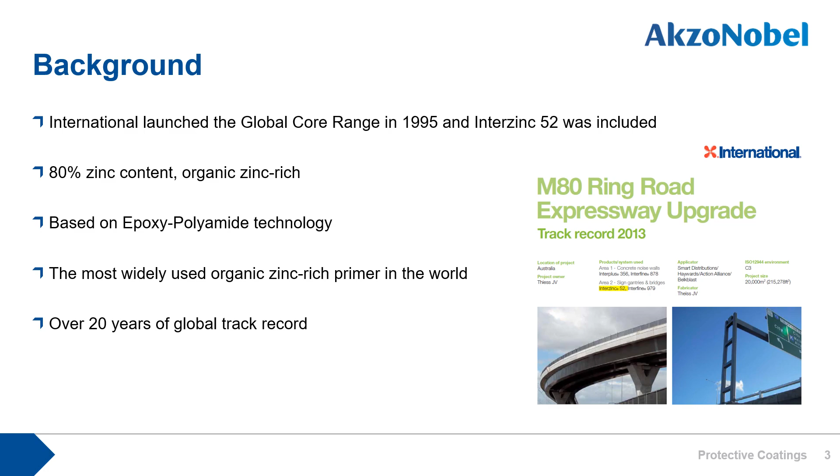We'll start off with a bit of background. International launched the Global Core range in 1995, and Interzinc 52 was included in that range. It's got 80% zinc content, organic, zinc rich as per ISO 12944. It's based on epoxy and polyamide technology, and Interzinc 52 has been the most widely used organic zinc rich primer in the world, with over 20 years of global track record to back that up. An example there on the right hand side.

Just a bit more recap on Interzinc 52. We've sold over 70 million litres globally, equivalent to about 400 million square metres of steel. We've used that in all markets: oil and gas, infrastructure, mining, power and so on. Got a great track record of excellent corrosion performance, and the application properties of Interzinc 52 have always been considered very good.

So the challenge to us at AkzoNobel International has been: how can we upgrade our offer? Looking to improve things like volume solids, drying times, overcoating times, and VOC. Feedback from our applicators has been it's really important to maintain the excellent application properties of Interzinc 52.

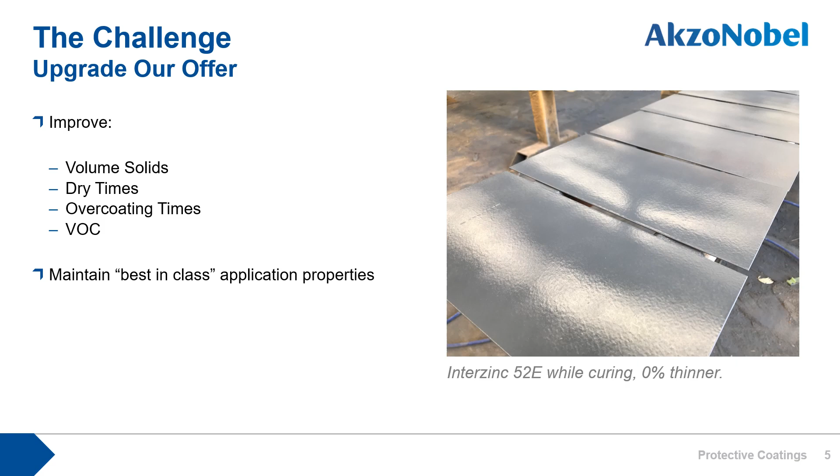So, Interzinc 52E, what are the key features? Well, we've maintained the excellent application properties, but at the same time we've improved productivity and we've maintained the excellent anti-corrosive performance.

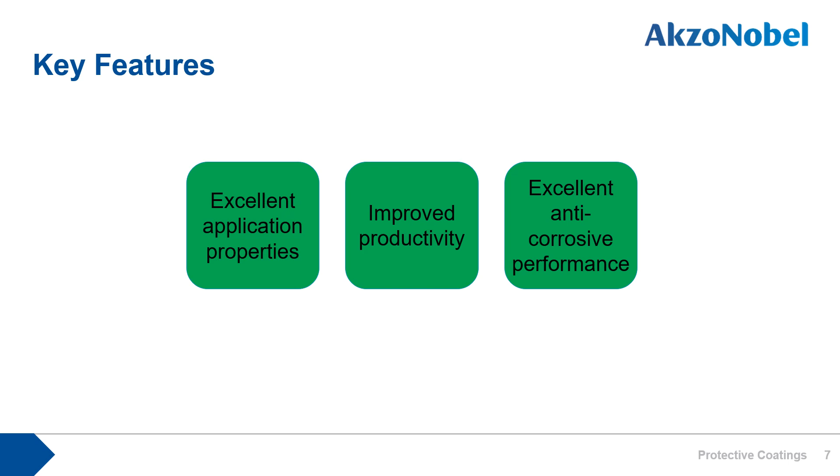So a bit more on Interzinc 52E. It's a two-component, high solids, fast-drying, rapid recoat zinc-rich epoxy primer, with 80% zinc dust in the dry film, as I mentioned earlier. That's compliant to the zinc-rich requirements of ISO 12944 and also to SSPC Paint 20 Level 2 Type 2, which requires 77% zinc or greater. It's 65% volume solids, 300 grams a litre VOC.

We've got a great improvement on the fastness of the resin, new resins there to help along, and the high performance that we've been used to with Interzinc 52. On the right hand side here we've got some steel that's been freshly sprayed with Interzinc 52E.

Moving on to anti-corrosive performance. We've done a lot of internal testing on Interzinc 52E prior to release: a lot of ISO 12944 testing, Norsok testing, salt spray testing, and also a couple of years of exposure at a port in the UK. From all of that, we've determined that Interzinc 52E has the equivalent anti-corrosive performance of Interzinc 52. On the right hand side we've got some panels showing some of that testing: scribe testing, pull-off adhesion, and various other tests.

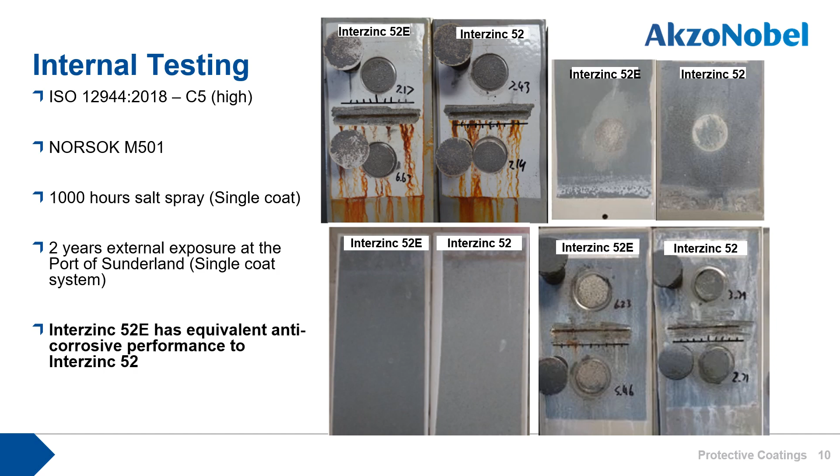So now for a bit more on cyclic aging testing. We've tested internally and at a third-party test house. It's a cyclic aging test, a combination of UV exposure, wet conditions, followed by salt spray, followed by low temperature conditions.

Depending on the severity of the environment that you want to use your product for, you need to do more cycles. For example, a C5 very high durability system would be 16 cycles, specified in ISO 12944. For a CX environment, that's 25 cycles for offshore use. Just to clear up any questions, the ISO 20340 is now part of ISO 12944 in a new part 9.

The requirements for CX are also the requirements for Norsok M501 System 1, so if you see either being requested, they are interchangeable. If you want to learn anything more about ISO 12944, the types of testing required and so on, we have a brochure on that, which you can see in the top right hand corner there, and an excerpt on the testing is below in the lower right hand corner.

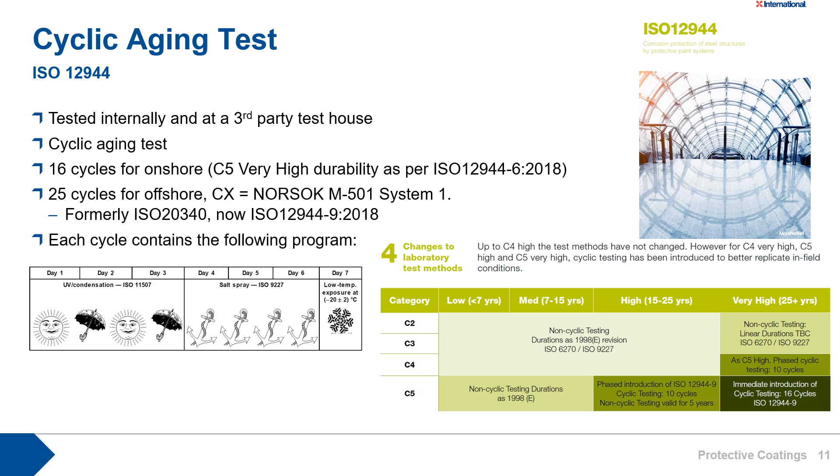Some more external testing now. As you can see on the slide here, we've done testing in C5 high durability and C5 very high durability, which affects the number of cycles we've had to test with. Looking at systems with Interzinc 52E, Intergard 475HS as the mid coat and Interthane 990 as the top coat. The global testing is ongoing to deliver more systems, but the key takeaway is Interzinc 52E provides the same reliable anti-corrosive performance as Interzinc 52, and that is done via galvanic protection.

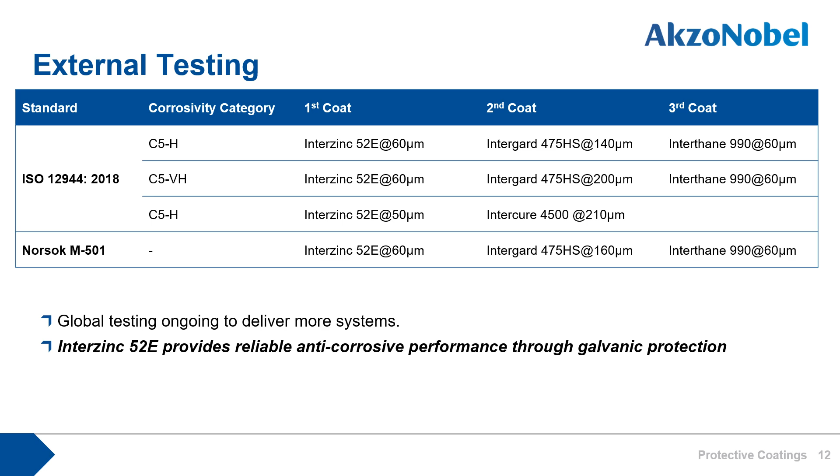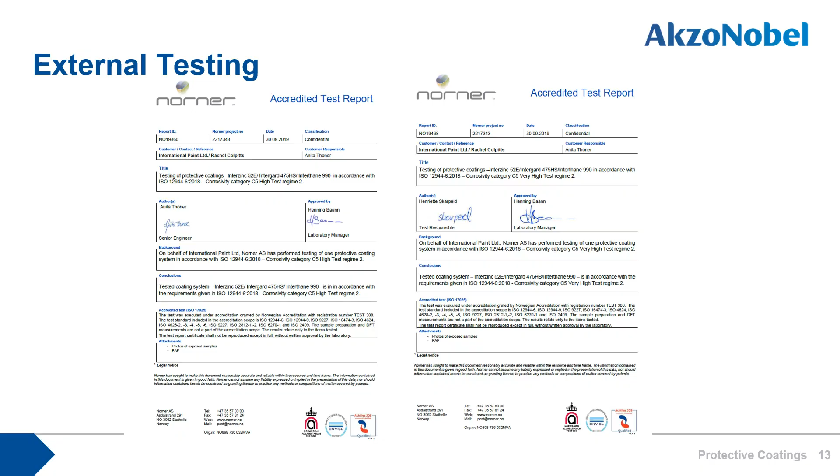Moving on to the product attributes. Comparing Interzinc 52 with 52E now, volume solids have increased by 6%, or relatively 10%. So that means for every square metre of steel, 10% less litreage of paint is required. VOC is down by about 10%.

Where the product really shines is in its reduction in time to paint again and for time to go hard. We've got a range of data here at 25 degrees. We can see touch dries down by an hour, hard dries down by 2.5 hours, minimum recoat also down by 2 hours, and at 5 degrees the difference is even more pronounced. So we've gone from a minimum of 8 hours recoat to 3 hours recoat, a saving of 5 hours. In cooler parts of the world and in cooler months elsewhere, that's quite a big saving.

One slight drawback is that the pot life, particularly at high temperatures, has been reduced from 5 hours to 75 minutes at 25 degrees—still a workable amount of time. At 40 degrees, the pot life's a bit shorter again. We found in trials that if you can have all your steel ready, there's plenty of time to paint it all. I've got some more of that on the next slide.

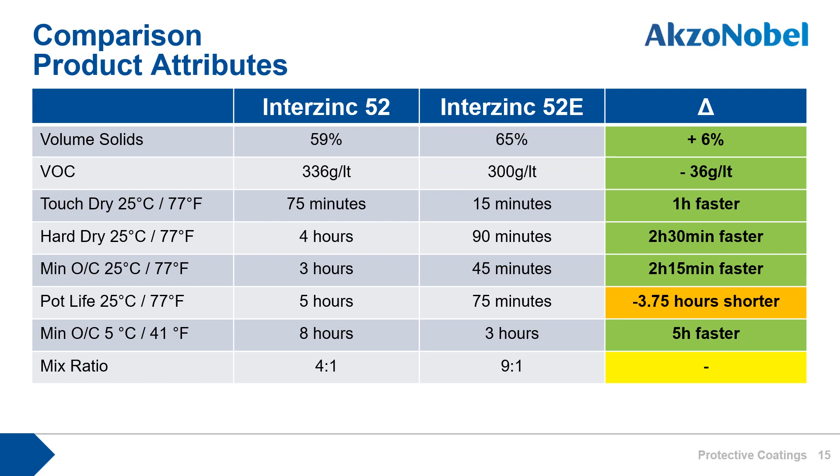A bit more on the pot life and productivity. As we've said, there's a big improvement in productivity with this new product. If we look at 5 degrees, for example, we've saved 5 hours, and the savings continue the warmer it gets. Pot life, we've still got plenty down when it's quite cool, 5 degrees, 10 degrees, no problems. I think probably about 40 degrees, some care needs to be taken.

30 minutes is obviously plenty of time to spray out 10 litres of paint if the steel's all ready, but if the steel's not ready, the clock sort of ticks. So the recommendation to all customers is please have all your steel ready before you mix up a full kit, so you don't get caught with the shorter pot life.

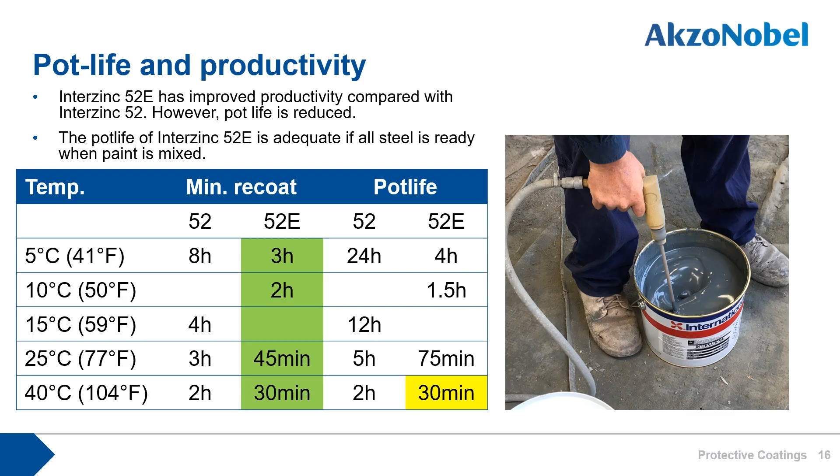A bit on the competitive landscape here. We've benchmarked Interzinc 52E against 52 and also some competitor products. Really pleased to see the minimum recoat drop down from 6 hours to 2 hours, and that's put us in line with a lot of our competitors there, and better than a couple.

Moving on at 25 degrees again, we've seen a massive reduction in our minimum overcoat time, which has put us close to the market lead there. Just a thing to highlight as well, Interzinc 52E still has that great finish and application properties. We haven't commented on other application properties here, but we believe the shorter overcoat times combined with the great application makes it a really compelling offer.

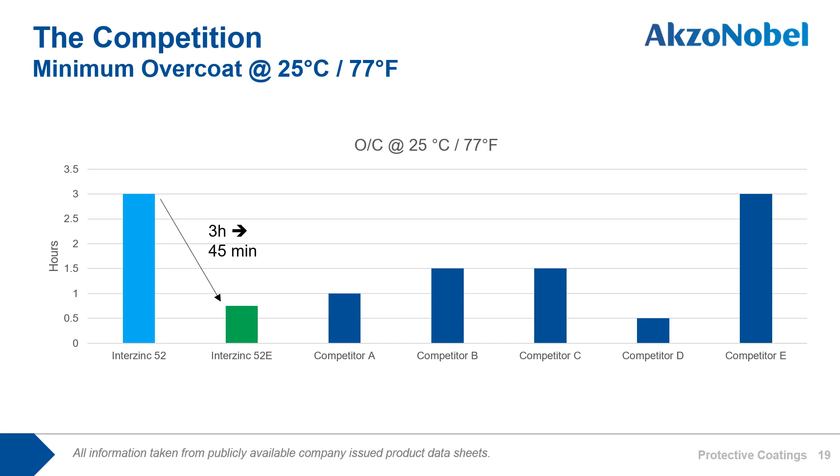Moving on to a couple of customer trials. We've done trials all over the world, UK, Sweden, Italy, Germany, Middle East and some in Australia. At the time of presenting, this product was fully released in Europe. I've done work in the field between 20 and 50 degrees, and obviously more work ongoing.

The feedback we've got from these trials has been consistent. The spray properties and finish is just as good as Interzinc 52, and customers have been pleased with the increased productivity.

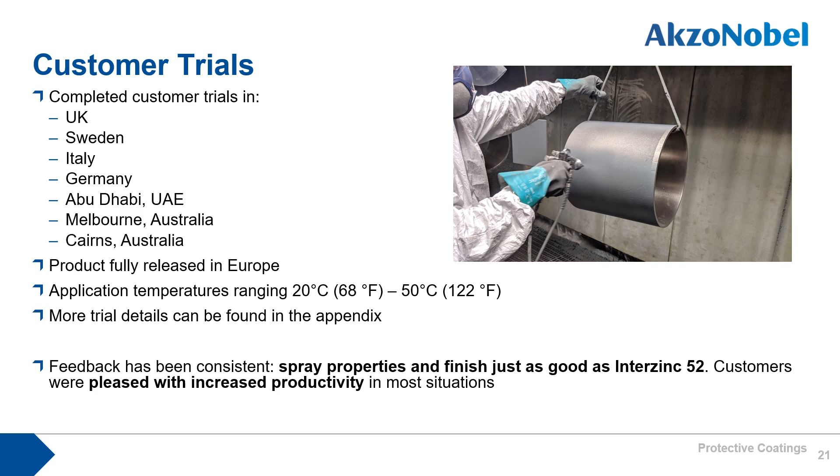Another trial in Australia that I attended, we did that at 34 degrees. It's quite warm in Cairns all the time, really. Despite the shorter pot life, the manager was very pleased with the shorter drying time, and from his point of view, he could easily spray the steel in time.

We came back the next day, no drips at 229 dry film. Obviously that's a bit excessive for normal use, but it demonstrates that the product is tolerant to over application.

Had a really good spray fan with a 60:1 airless there, no need for thinner to get a nice spray fan. We've got some photos here on the right of some freshly applied paint. In this experience we used no thinner, as I mentioned. A couple of percent thinner may ease it and may increase application properties slightly, but certainly there's no requirement for that.

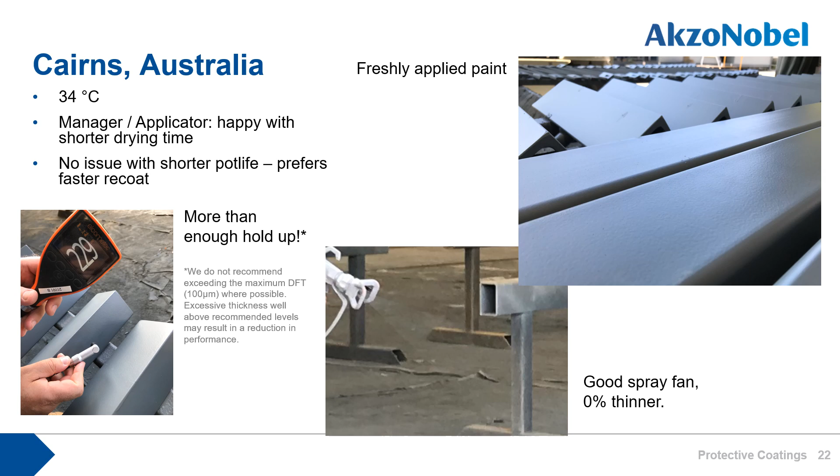Some feedback from the UK as well. Manager there was very pleased. He was expecting some problems with solvent entrapment and adhesion based on the really quick recoat time, but we put Intercure 200 over it, no problems. Came back the next day, it was all very solid. Good adhesion, couldn't scrape any off with the penknife there. So yeah, we've been very pleased.

Moving on to supply. As I mentioned, Interzinc 52E has already been rolled out in Europe, and that rollout will continue throughout the globe in 2020. Standard pack sizing is a 10-litre kit in the metric world, or a 3 US gallon kit in the imperial world. Smaller packs will be available in some regions. Please get in contact with your local sales rep for more details.

Our metric packs will be supplied in grey, as they have been for the previous product, and imperial packs will be supplied in green, as per the previous product.

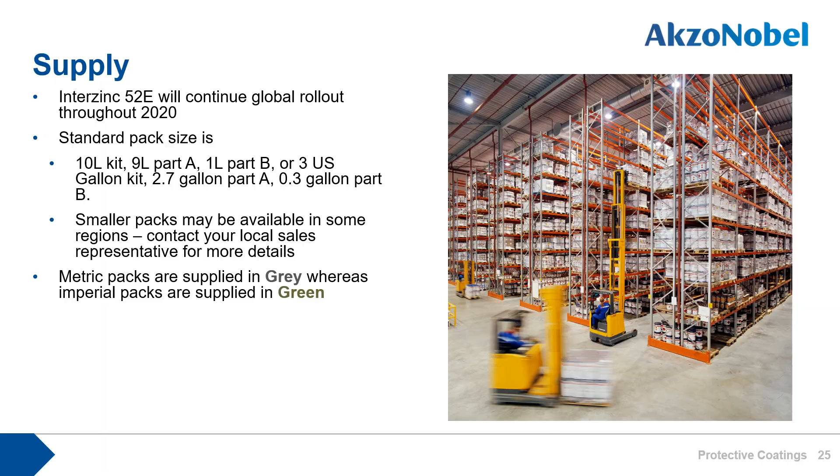Just an update on what literature we've got available today. We've got our standard data sheet available, a brochure in 2 pages, both in English and Chinese. Performance testing data is available. New documents will appear on our webpage as usual under Interzinc 52E, and we've also got this presentation that you're listening to now.

So time to wrap up now. Why use Interzinc 52E? Well, it's built on the Interzinc 52 track record of greater than 20 years and 400 million square metres of steel. The application properties remain excellent, as does the product finish, with no pinholing seen in second coats.

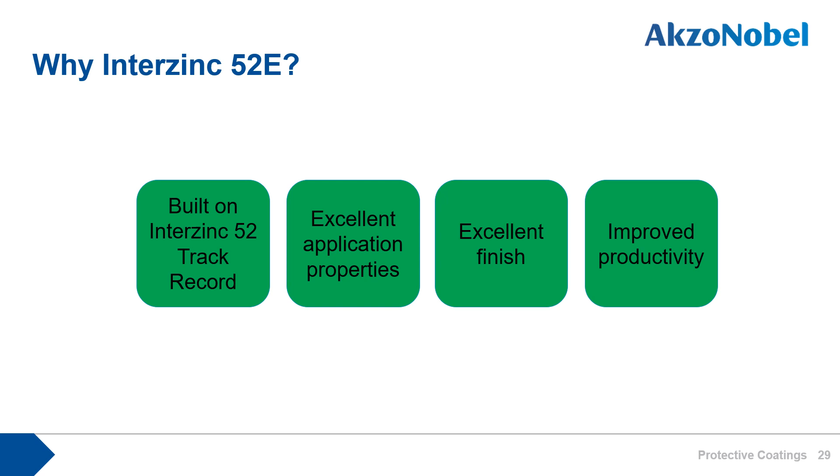Most importantly, I think the improved productivity is the real game changer here. Big time savings to be had, low temperatures, mid temperatures, and much faster overcoating, so you can get your steel much more quickly through the yard.